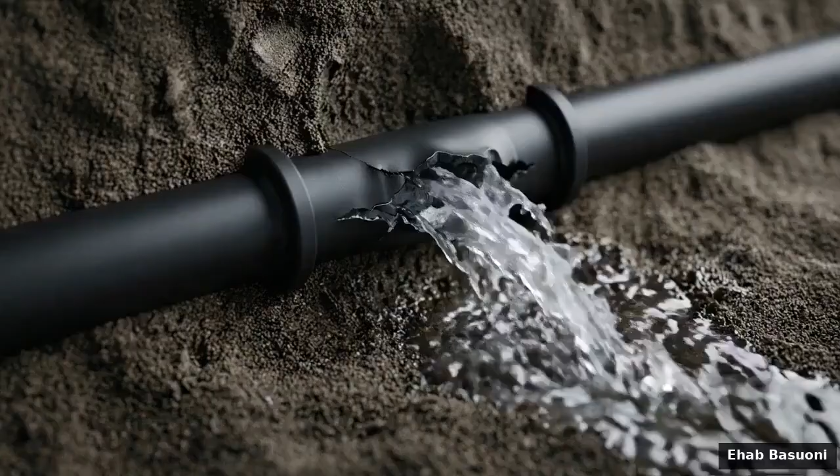Every single day, millions of gallons of perfectly treated, highly pressurized drinking water leaks directly into the soil. It never reaches a faucet. It escapes pressurized distribution grids through thousands of microscopic fractures and catastrophic ruptures alike.

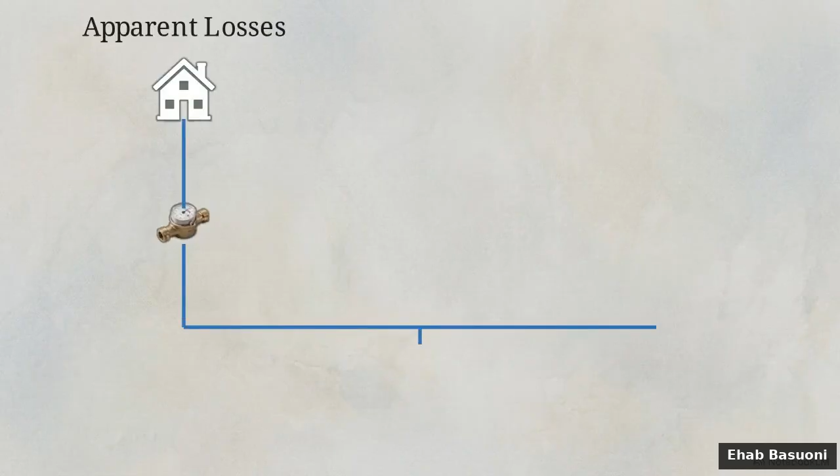Utility engineers divide this infrastructure failure into two distinct categories. Apparent losses represent water that is consumed but not paid for, due to metering inaccuracies or unauthorized connections. Real losses, however, are the actual physical leakage from deteriorating pipes, valves, and underground service connections.

To quantify this hemorrhage, utilities rely on a strict auditing framework called the Water Balance Matrix. It maps the total volume of water pumped into the system and tracks exactly where it ends up. The matrix reveals a precise mathematical gap.

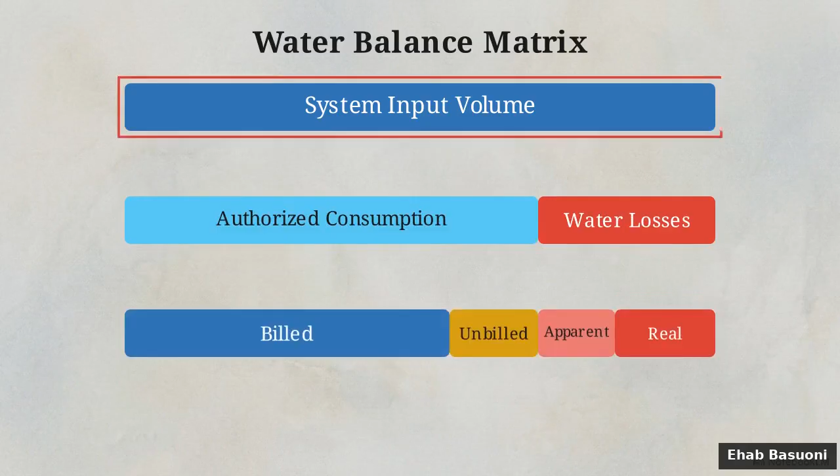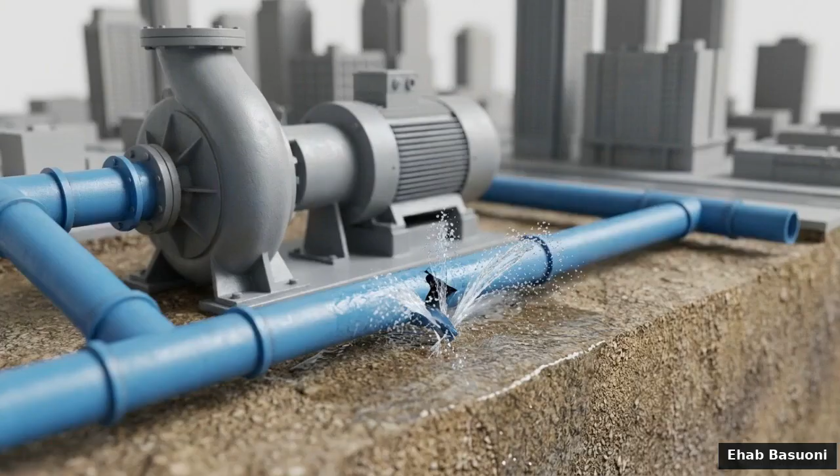By taking the system input volume, the total amount of water produced, and subtracting the billed authorized consumption, engineers define the remaining volume as non-revenue water. It represents the exact volume of water a utility spends money to treat and pump, only to lose entirely.

Finding the source of this lost volume is a massive logistical challenge. You cannot solve it by sending crews to blindly search for wet pavement. Eliminating physical leaks across an entire city requires a top-down spatial isolation strategy to systematically shrink the search grid.

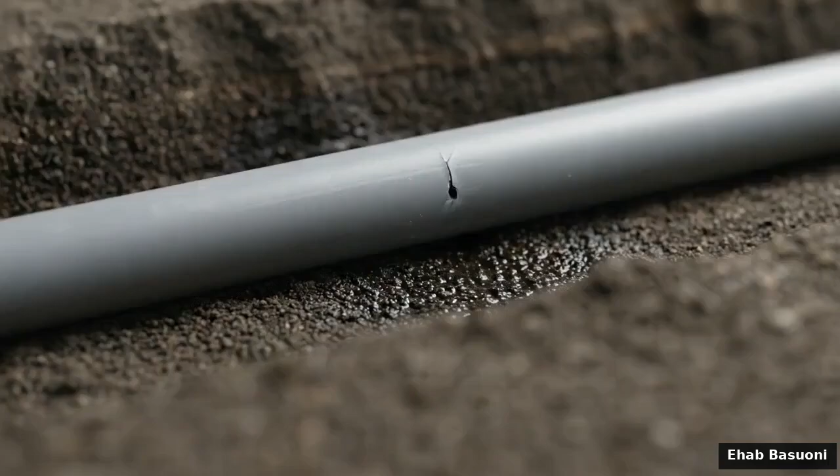When the public thinks of water loss, they picture a geyser erupting through an intersection, but the true threat to a utility's capacity is entirely silent. It is the slow, invisible pipe leak, running continuously underground for months. This chart illustrates loss volumes.

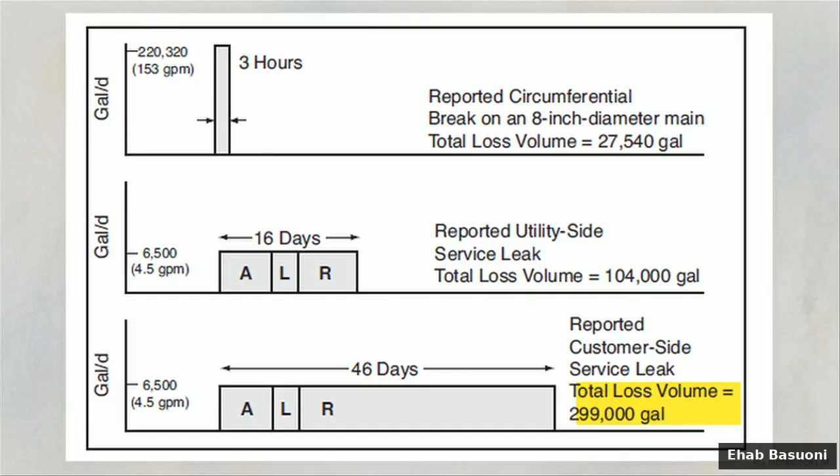A sudden main break loses 153 gallons a minute, but is repaired in 3 hours, capping loss at 27,000 gallons. A small service leak loses only 4.5 gallons a minute, but over 46 undetected days, total loss approaches 300,000 gallons.

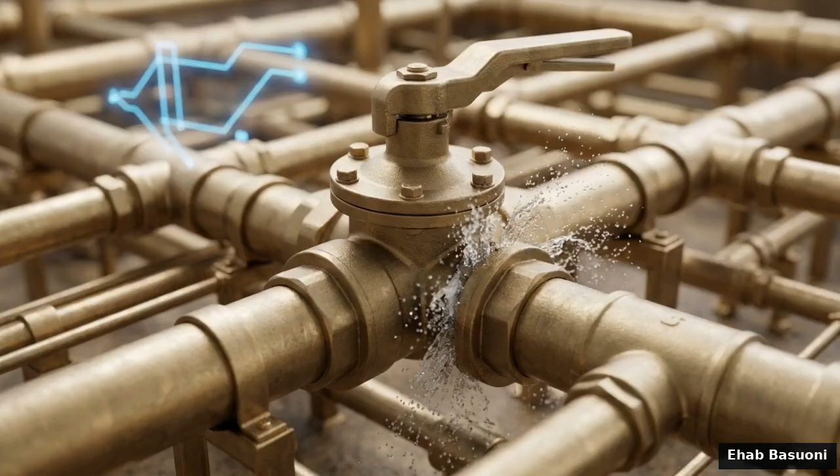These hidden, long-duration leaks are constantly aggravated by cyclical transient pressures, often referred to as water hammer. Every time heavy pumps cycle on or industrial valves shut rapidly, hydraulic shock waves travel through the grid, expanding existing microfractures in aging metal and PVC.

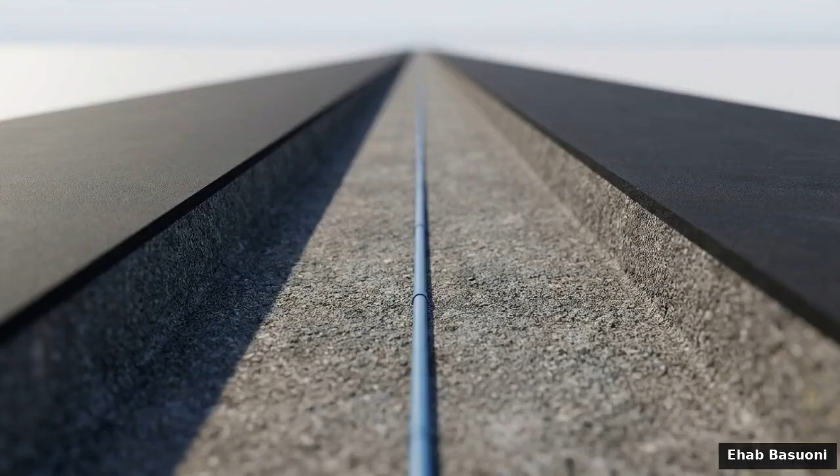Finding one of these small service leaks across thousands of miles of buried pipe is impossible through surface observation alone. The search area has to be drastically narrowed. Utilities must move beyond reactive, visual inspections. The only viable method to locate long-duration leakage is to physically partition the network and use precise volumetric math to prove exactly which neighborhoods are bleeding pressure.

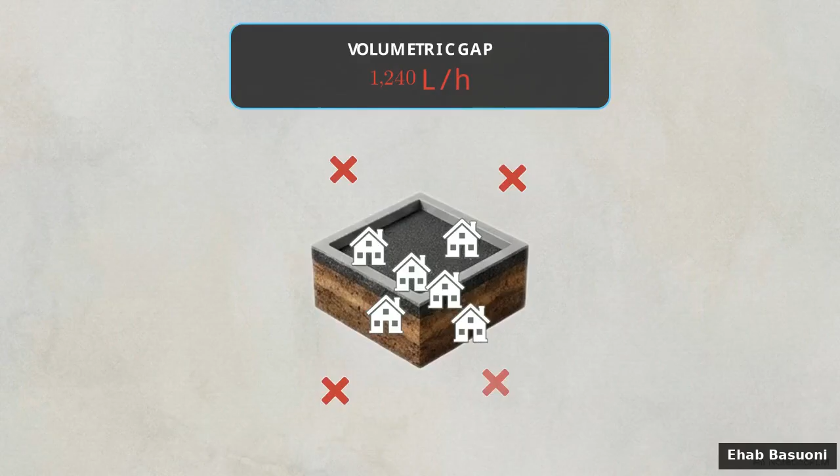The foundational step in this process is establishing a district metered area, or DMA. It breaks a massive, unmanageable municipal water grid into small, tightly controlled sectors. Engineers create a DMA by permanently closing specific boundary valves along the perimeter of a neighborhood. They leave only 1 or 2 inlet pipes open, outfitting them with dedicated bulk flow meters.

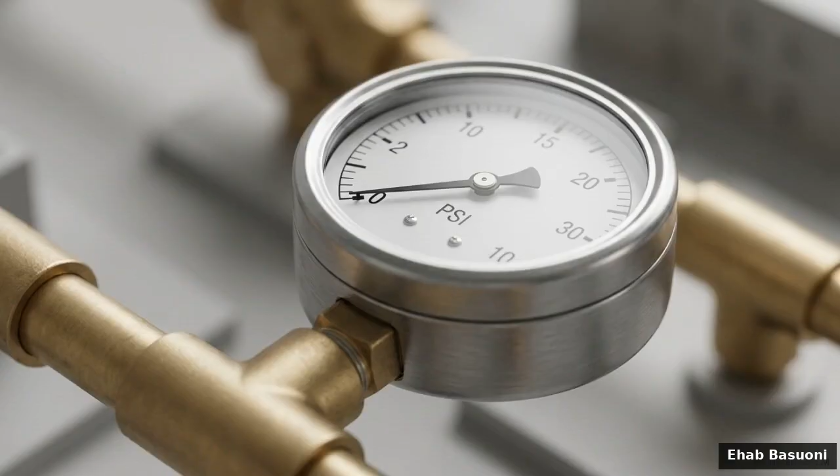Before any data is recorded, the sector must pass a zero-pressure test. Crews shut off the inlet valves and verify that the water pressure inside the sector drops to 0. This mathematically proves the zone is hydraulically isolated, with no unknown pipes feeding water from the surrounding grid.

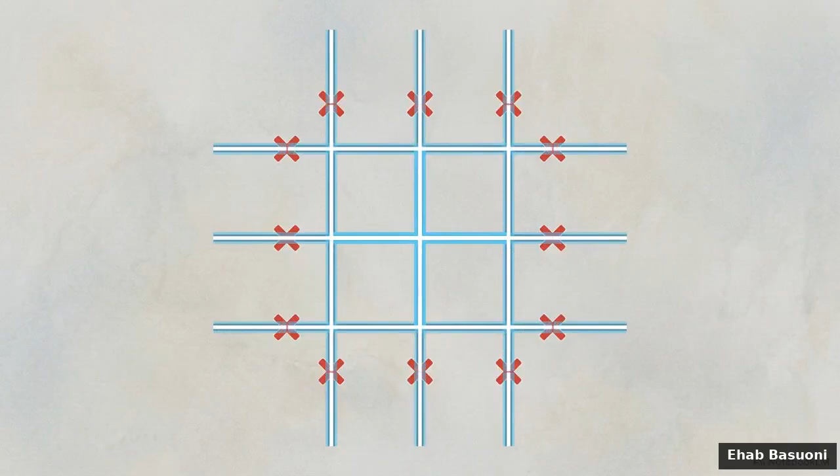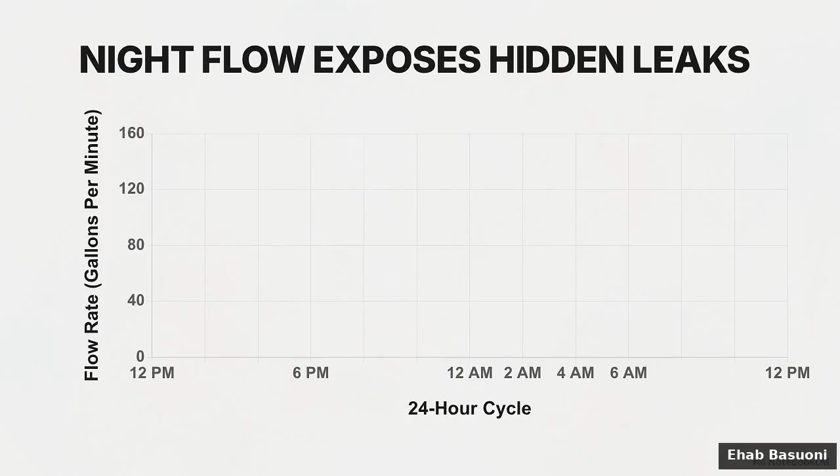With the boundaries sealed, the bulk meters begin tracking every drop of water entering the DMA. The critical metric engineers monitor here is the minimum night flow. Between 2 and 4 in the morning, baseline consumer demand drops to near 0.

If the bulk meter registers a high continuous flow rate entering the DMA during this deep night period, that water is draining straight into the soil. The minimum night flow isolates the exact volume of physical leakage for that specific sector.

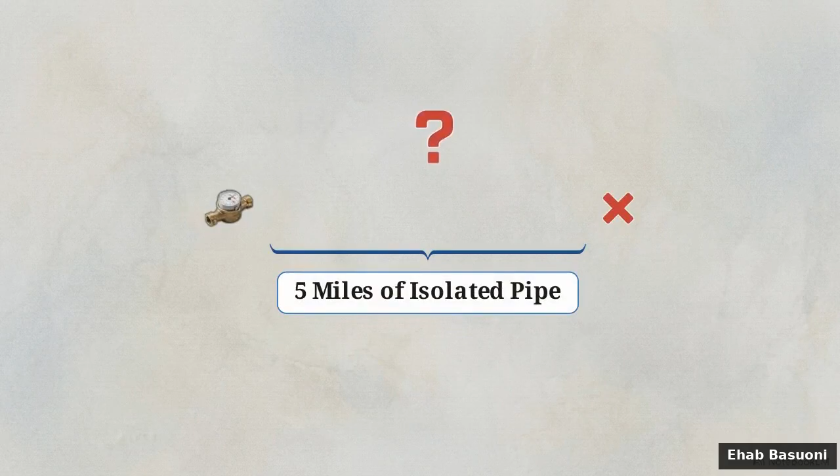This volumetric data confirms that a specific neighborhood has a severe leak, but it provides zero spatial data. The meter cannot tell you where along the 5 miles of isolated pipe the failure actually sits. Once a DMA is flagged as non-compliant, the macro-level audit is complete. Field crews must deploy into the flagged sector, relying on micro-level acoustics and physics to pinpoint the exact failure.

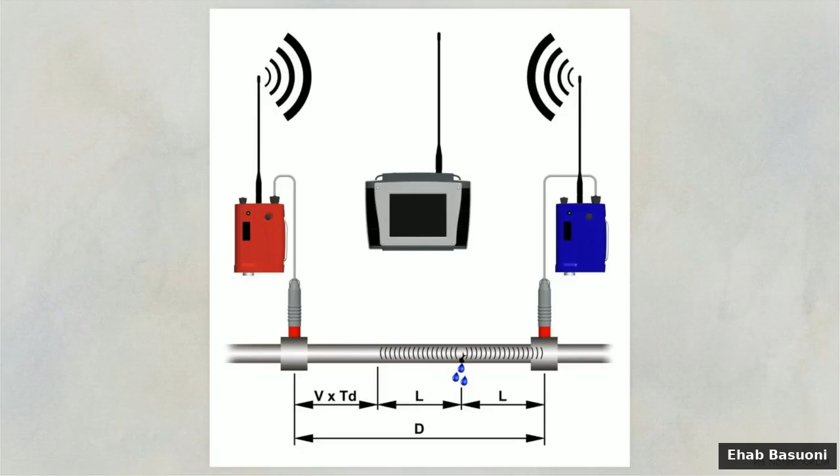Escaping water under pressure creates acoustic waves radiating outward in both directions along the pipe wall. Unless the leak is dead center between the two sensors, the noise will hit one transmitter before the other. This creates the first critical variable, the signal time delay.

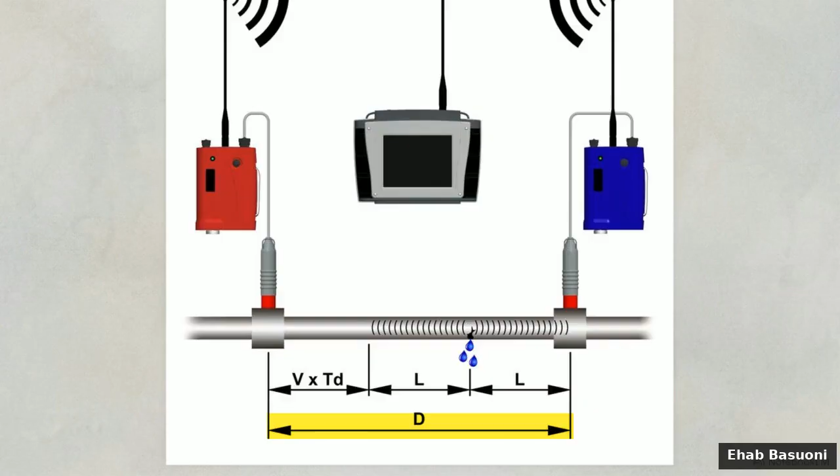To calculate the exact leak position, represented by the variables at the bottom, the central receiver requires two inputs: the total distance between the two sensors and the exact velocity of sound traveling through that specific pipe material. Sound travels at a very different speed through iron than it does through PVC.

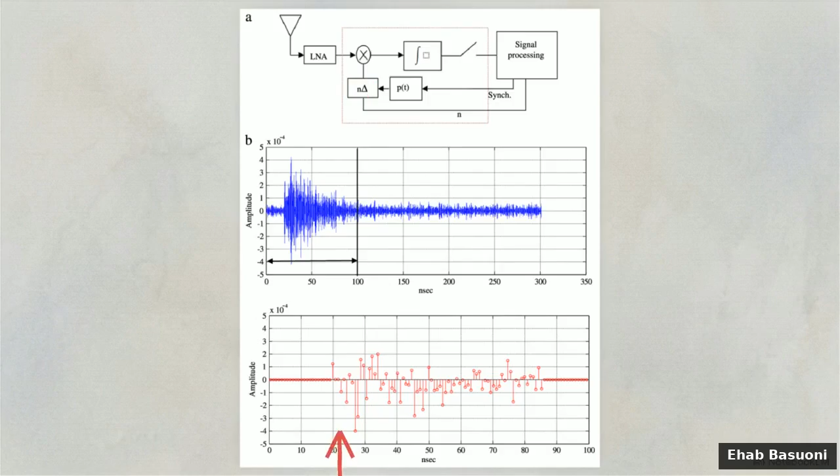This schematic shows how the unit analyzes acoustic data. The receiver runs a mathematical cross-correlation, sliding the noise signature from the first sensor against the second until the wave patterns align. In the bottom graph, this alignment is marked by the maximum vertical spike. That peak vertical spike gives the processor the exact signal time delay down to the millisecond.

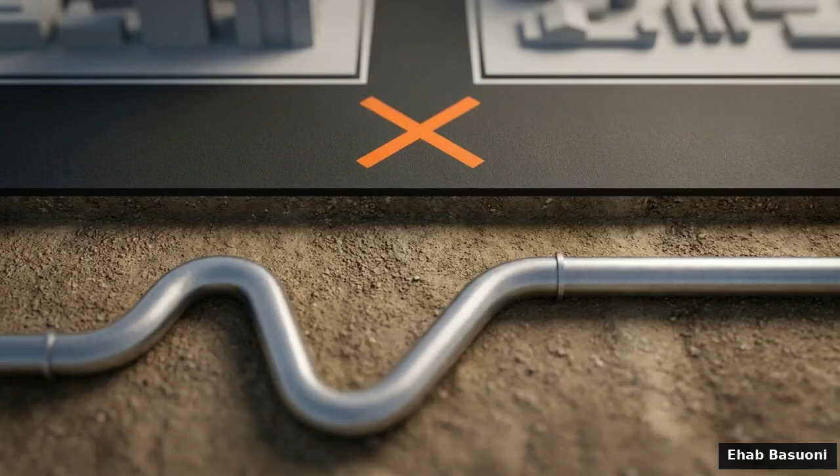Plugging that delay into the algorithm yields the precise physical distance to the leak. The technician now has an exact measurement down the pipe to mark for excavation. Acoustic successfully mapped distance linearly along a pipe. But if the utility's records are outdated and the pipeline's exact physical routing through the soil is undocumented, knowing the distance along a winding, untracked pipe is useless.

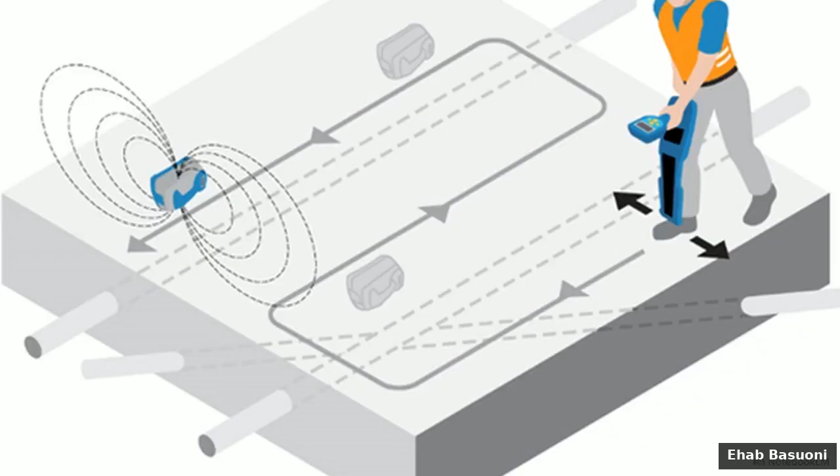When dealing with legacy underground networks, utility crews frequently encounter sections of undocumented pipe. If you do not know the pipe's physical vector beneath the pavement, acoustic correlation cannot guide an excavator. This diagram demonstrates pipe locating equipment utilizing electromagnetic induction. A surface transmitter connects to the pipe or a tracer wire, injecting an alternating current. This forces an electromagnetic field, shown by the dashed circles, to propagate upward through the soil. The pipe acts as an antenna.

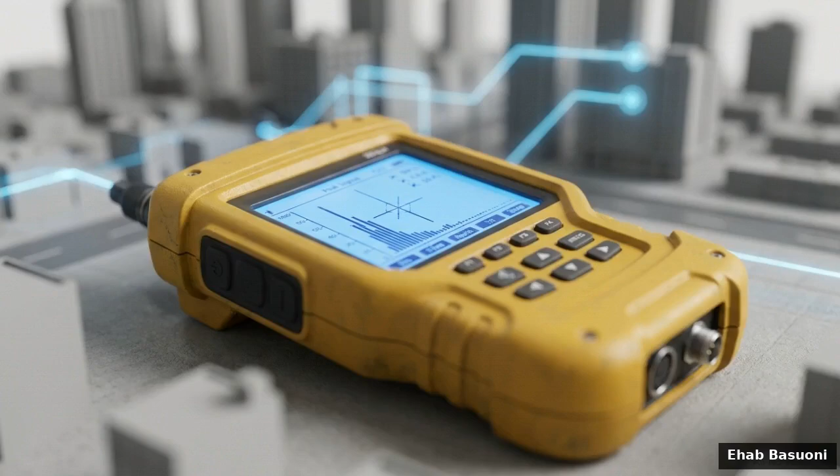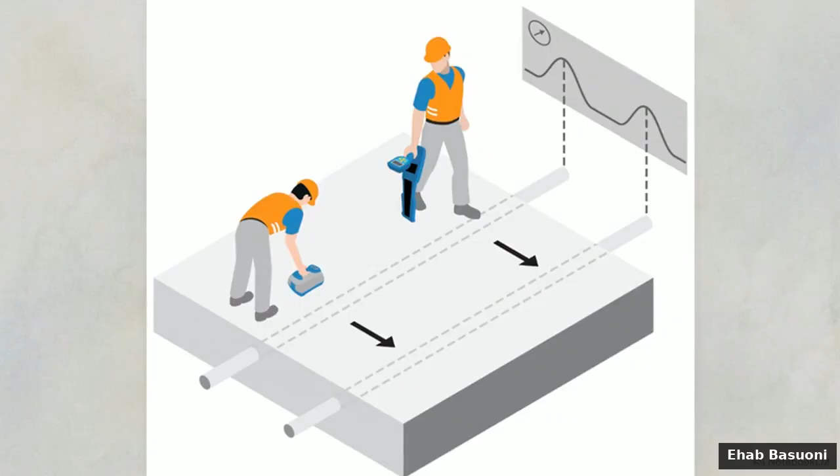A technician on the surface carries a specialized handheld receiver. This unit is calibrated to isolate and track the specific frequency and field strength radiating from the pipe below, filtering out interference from adjacent power lines. This diagram shows the process in action. Technicians sweep the surface, watching their displays for the strongest signal peak. By following that peak, they map the exact directional vector and burial depth of the buried pipe.

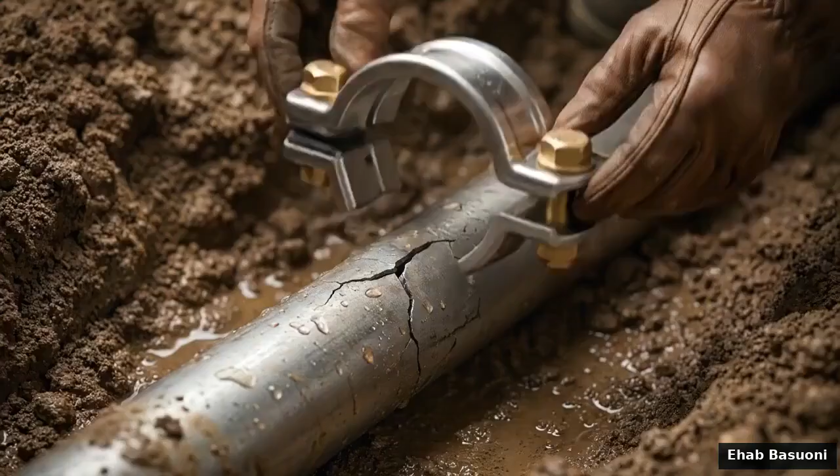A safe excavation requires layering all of these verifications. A utility uses volumetric isolation to flag the zone, acoustic calculation to determine the distance to the leak, and electromagnetic tracing to map the pipe's exact location in the earth. Only then do they break ground. The operation concludes in the trench. Crews expose the pipe, clean it, and install a heavy repair clamp, sealing the fracture and restoring structural integrity.

But many utilities make a critical operational error right at this step. They treat the physical clamping as the end of the job, bury the asset, and move on. While a physical repair stops the leak, its value is temporary if the data remains disconnected. A Geographic Information System, or GIS, provides the digital feedback loop needed to integrate this fieldwork into the utility's long-term maintenance strategy. Before leaving the site, field technicians must execute a strict data logging protocol.

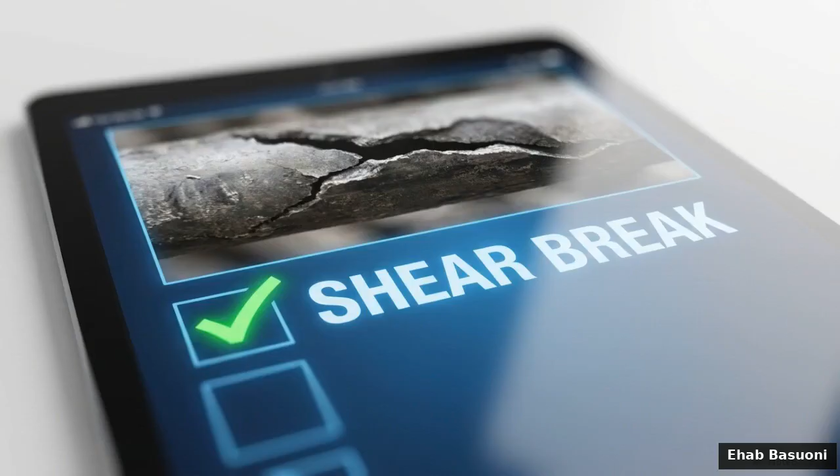They record the exact spatial coordinates, the pipe material, its diameter, and the specific mechanism of the fracture. This raw field data is immediately pushed to the central database, registered against the customer's geographic address code, and synchronized with the utility's billing systems. This data upload ensures the operation does not remain a forgotten patch in a dark trench. It transforms the intervention into a permanent, highly searchable historical data point within the digital grid.

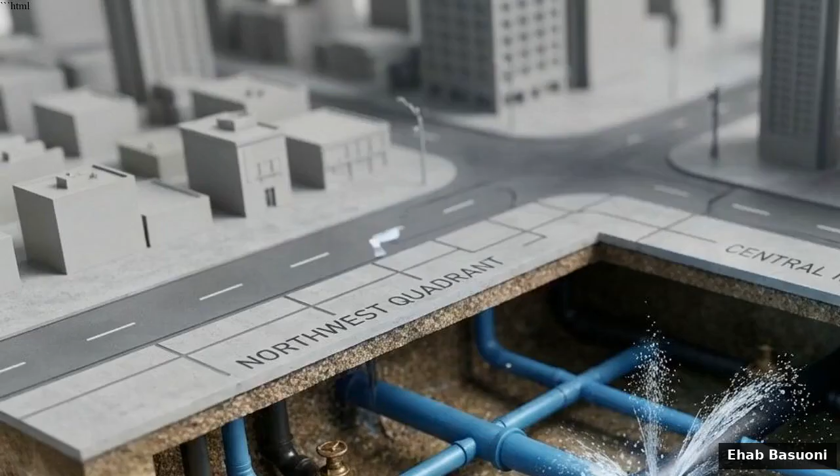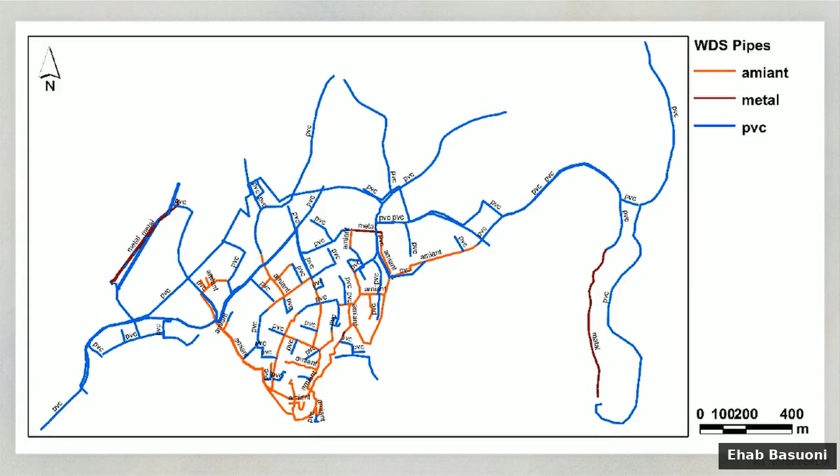As crews perform hundreds of documented repairs over several years, the steady accumulation of localized data reveals specific failure patterns across the entire infrastructure grid. This GIS map categorizes pipe materials across the network. Using aggregated data, predicted spatial heat maps overlay the base map. Notice the dense cluster of orange lines here. It clearly isolates that legacy amiant pipes fail at a substantially higher rate than surrounding PVC.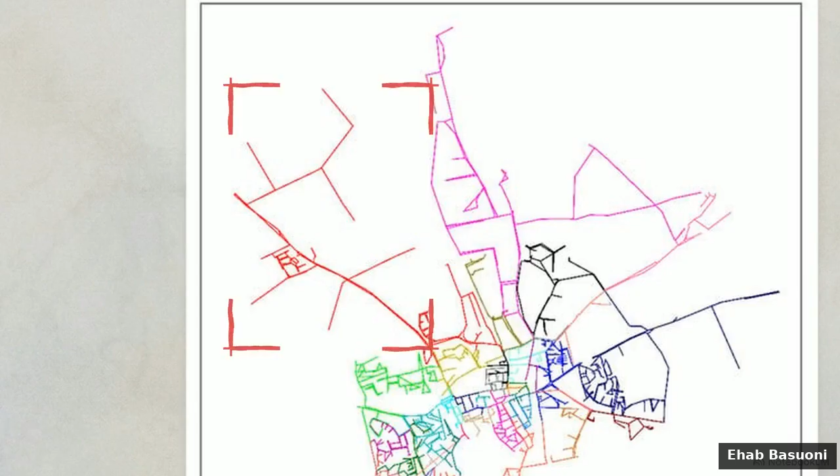This multicolored network map displays a heavily interconnected system. By continuously running algorithms against the compiled historical data, GIS modeling visualizes exactly which of these zones are mathematically most vulnerable to future transient pressures. This data transitions the utility from a reactive posture to a predictive one. Instead of waiting for surface ruptures to authorize a project, managers can now prioritize pipeline replacement based on the mathematical probability of the next failure.

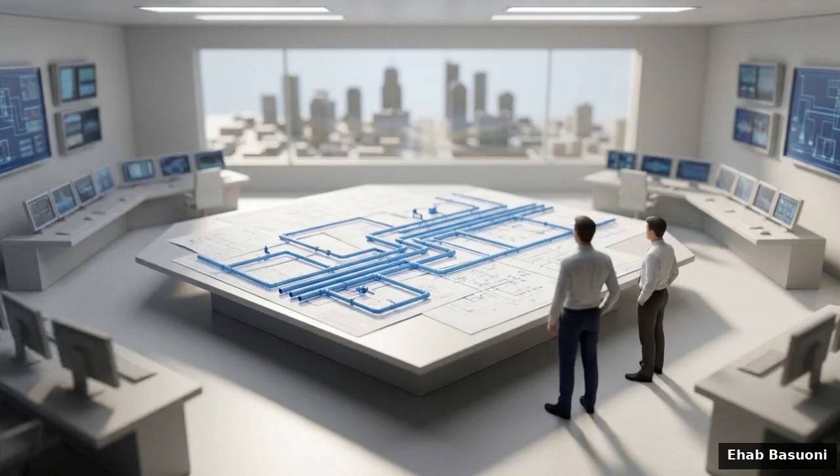Reducing non-revenue water is an ongoing engineering challenge. It requires mastering the physics of acoustic correlation and electromagnetic induction in the trench. The true infrastructure resilience comes from digitizing those physical interventions, turning a sprawling, deteriorating pipe network into an actively self-diagnosing digital model.